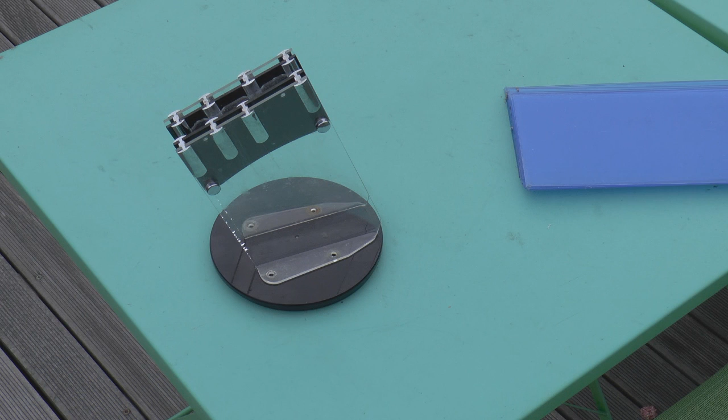Today we're going to take a bit of a diversion. Now, I've had quite a few people ask me just how I go about designing some of the things that I create. It's a very difficult question to answer because I can't really tell you. It's a really strange thought process that you have.

Today I'm going to show you how I go about solving a problem, which I haven't got a solution for yet, but I've recently acquired a Nespresso machine. All these silly little coffee pods, they don't really sit very easily in that container. You have to use up cupboard space to store these things.

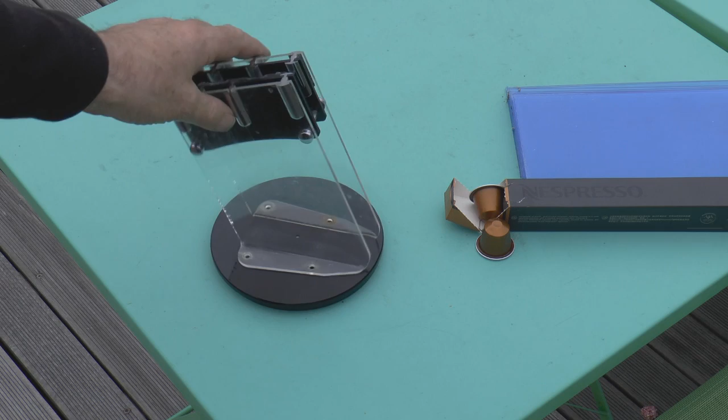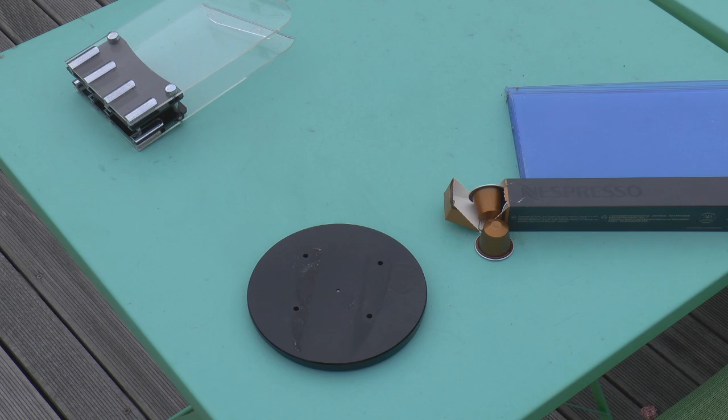Some of you may remember back to a project that I undertook for my wife for Christmas, and I made her a brand new knife block for a set of knives that she had for Christmas. And this is the old knife block that we dispensed with. It's got a nice rotating base on it, and if I throw that piece away, that becomes the starting point for my Nespresso coffee pod holder.

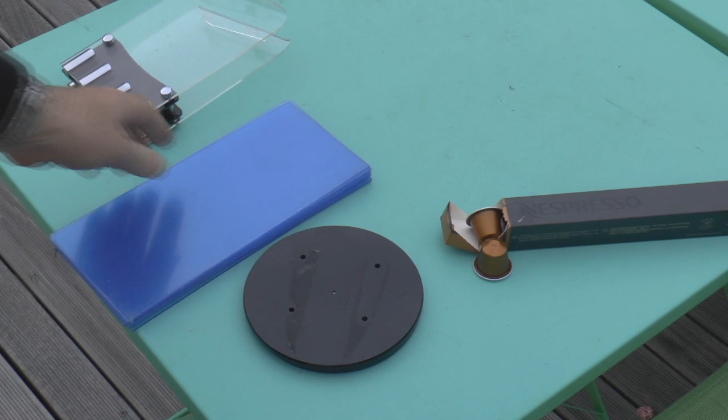Here I've also got a whole load of 1.8 or 2mm thick blanks, which I'm going to try and make use of. So we've already got a few design constraints before we start. And so what I'm going to do now is to take you through the process. I don't know what that process is because I haven't done it yet, but I'm going to take you through the process that I'm going to use to try and create this coffee pod holder.

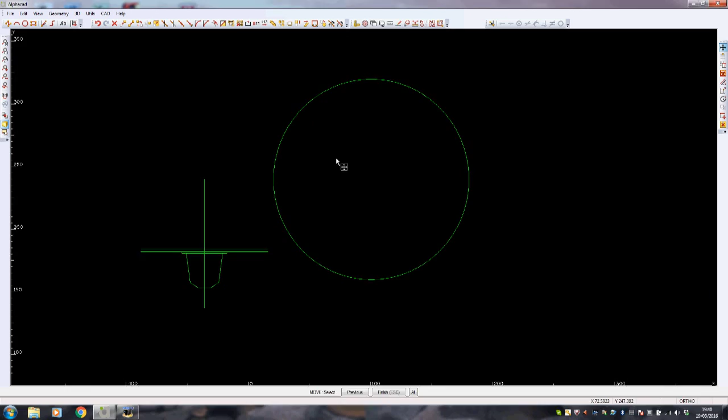Okay, well here we are in my CAD system with the basic components that I'm going to be able to use. Here I've got a picture of the coffee pod, which I've measured accurately with my digital caliper. And on top of that I've put a piece of my 2mm acrylic, and here I've got a 160mm diameter circle which represents the rotary table that I'm planning to use.

So what we've got here is basically a plan view looking down from the top, and how I imagine this is something like this. That would be an ideal position because the coffee pods do not hang outside the rotary turntable. So if the rotary table fits somewhere, then the coffee pods won't clatter into anything else.

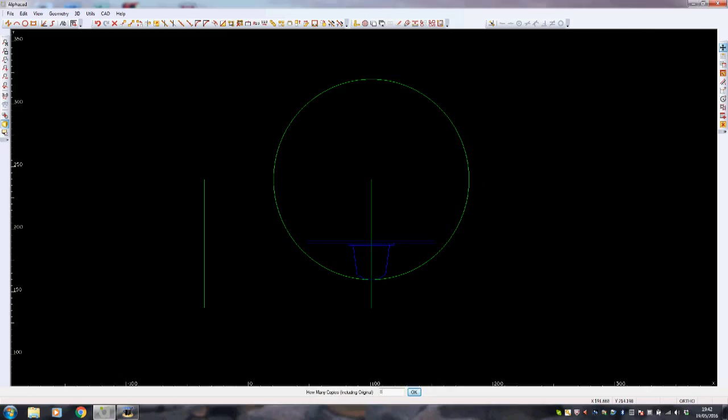Let's just have a quick look to see how many of those I can fit round here, because it looks as though I should be able to fit 8 of them. So I'm not going to explain how my CAD system works, I'm just going to do it and you can see the end result. F8, 45 degrees, enter 8 of them. And there we go. So now I've got a pattern of 8 of them.

But that's not quite going to work how I imagined it at the moment, because if we look here at the coffee pods, what I'm trying to do is to get the coffee pod sitting against a back plate, and I want to extend that back plate through to the next coffee pod, so that that back plate, when it's extended, captivates this coffee pod here. And I can't quite do that at the moment because the coffee pods are too close in to centre.

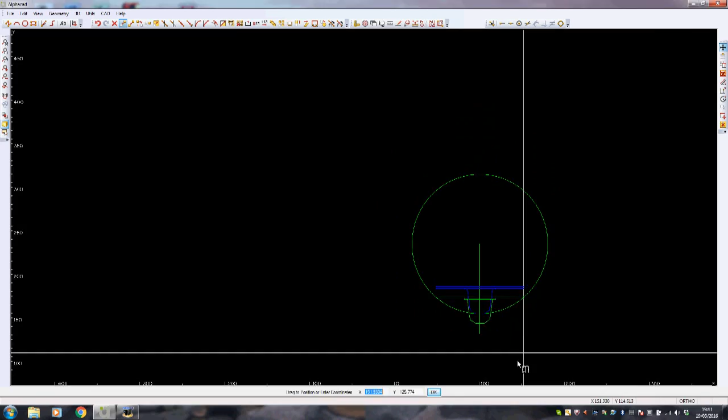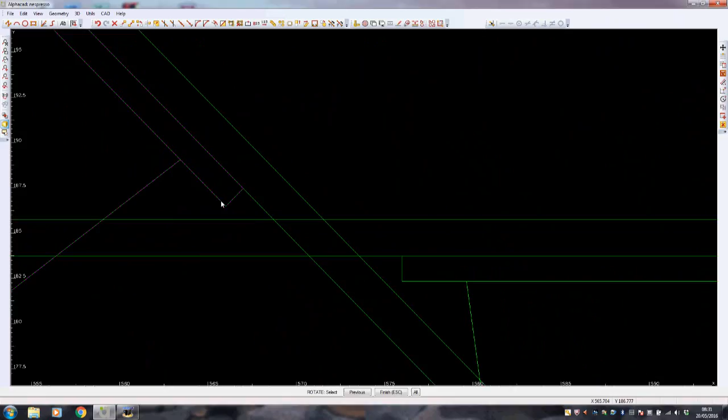So let's just back up. So we move the coffee pod and its piece of material. We'll move it down to a position like that. And now we'll try and put 8 of them in again. 45 degrees times 8. And now what we've got to do is to zoom into this area here, and all of a sudden we can see that the coffee pod corner is clear.

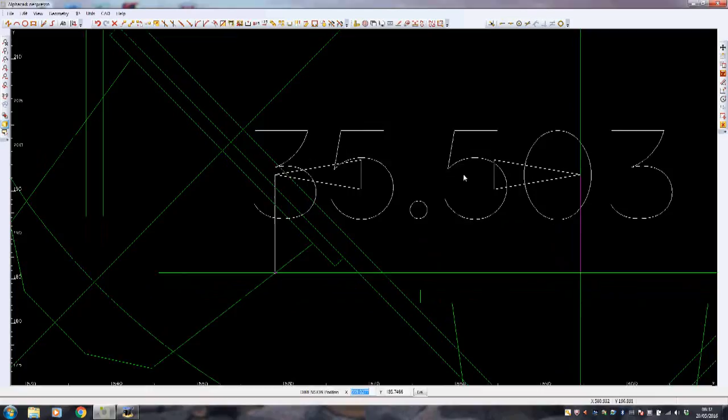We'll just measure a horizontal dimension from the centre line there to where it's going to hit that next coffee pod. That's a dimension of 35.5. So I think what we'll do, we will make this dimension here 35mm, and the quickest way to deal with this is to back up and get rid of everything, and then we'll put an offset of 35mm.

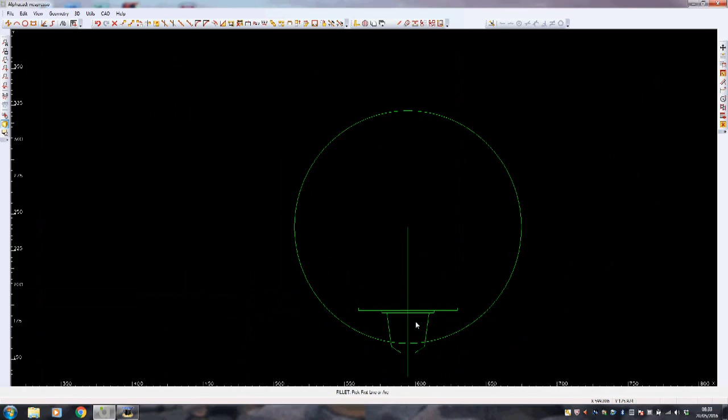Right, so that's now one of the main elements. When I say designed, we've got a long way to go yet, but that's the fundamental design principle sorted. So what we can now do is do a repeat of the rotate.

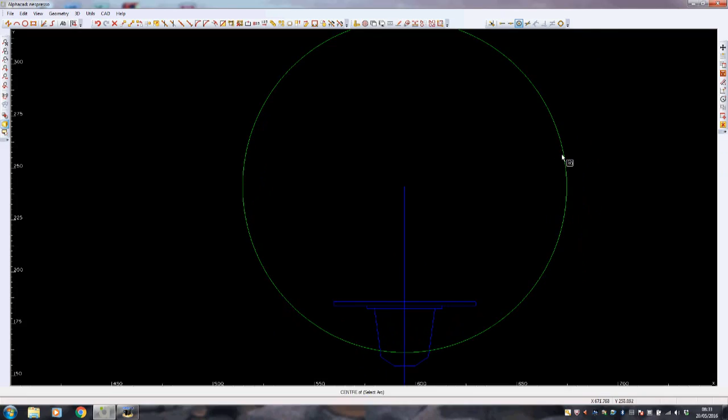Well, there's our geometry sorted out. We've got the intersecting plates, and when I say intersecting, if you hold your hands up with your fingers apart and then put them together, they will interlink, and that is effectively what I'm going to try and achieve on these corners. So now what we need is a view from the front.

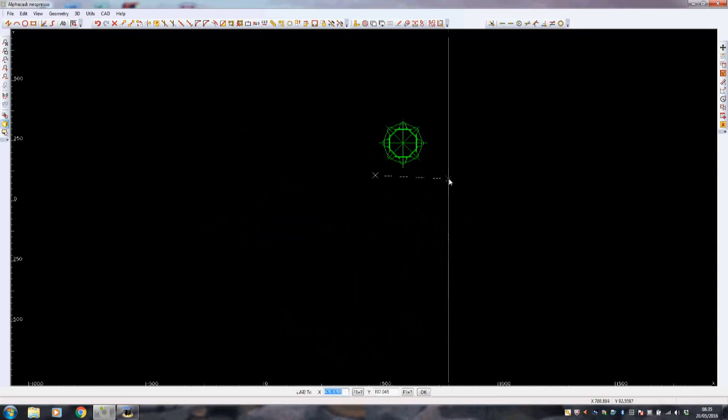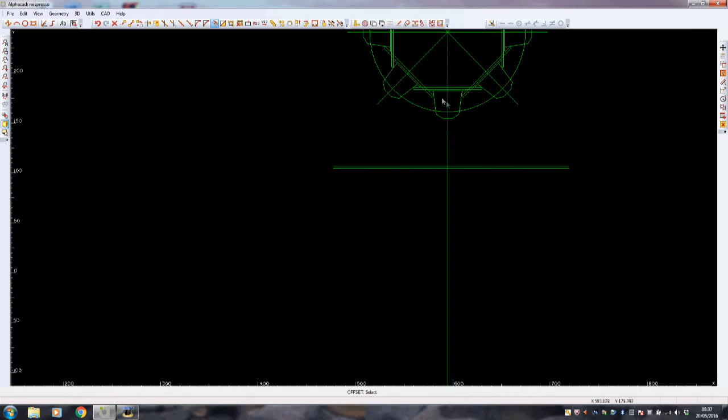So start off with a line. It's going to be a horizontal line, and I'm going to draw a line across the top here parallel to this one, 2 millimeters down, because that's the top plate that I've got to have on. And then we're going to try and fit probably 6 coffee pods into the height of the material that I've got available to me. The coffee pod size is 37.1,

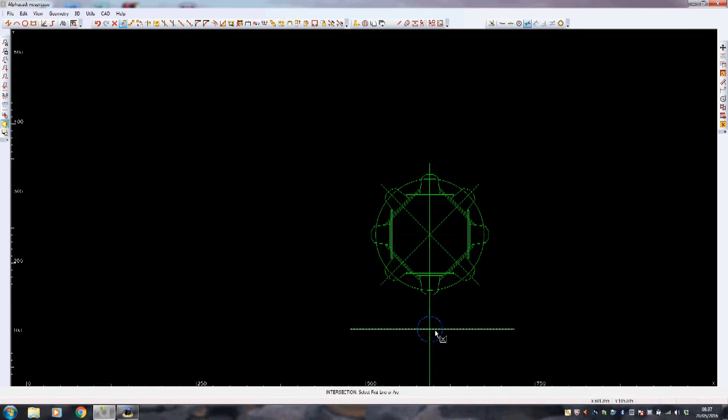and we'll position that circle just here for a moment. And then we'll reposition that circle. We'll move that circle from its known position so that the intersect there goes to that intersect there. There we go. So now we've moved that to just the top of the stand, and now we're going to put 6 of them in.

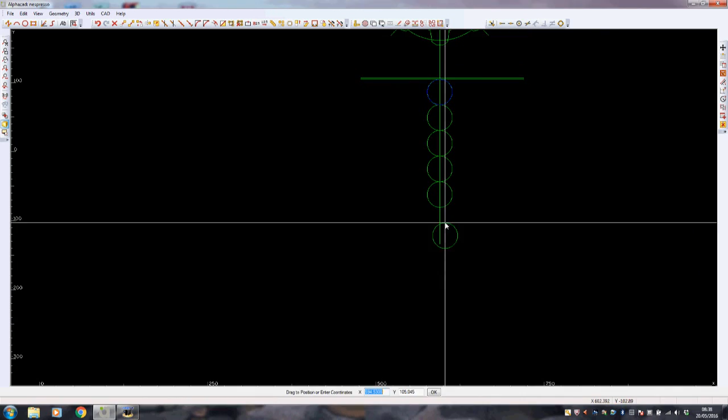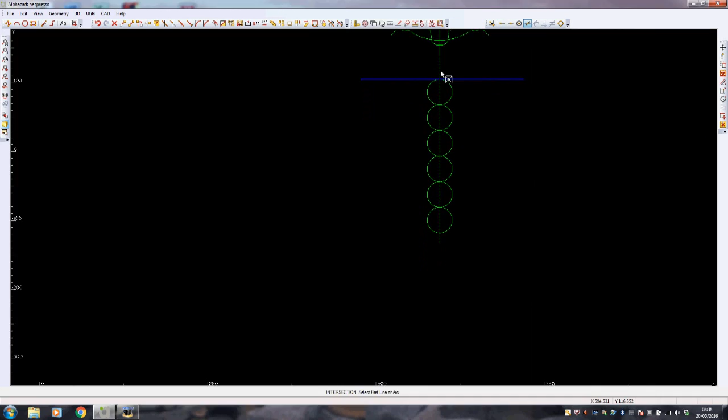And there we go. And so now we can draw, let's copy that line. So we'll copy both of those lines. And we'll copy them from the intersect at the top there to the intersect at the bottom here. That's defined the height of the unit. And now what we've got to do is work out what shape we're going to see on the front here to get these plates to overlap.

So to do that, I'm going to copy that line there, from there to there and there. Alright, so that's the width of, let's extend that. So that's the width of one of our panels.

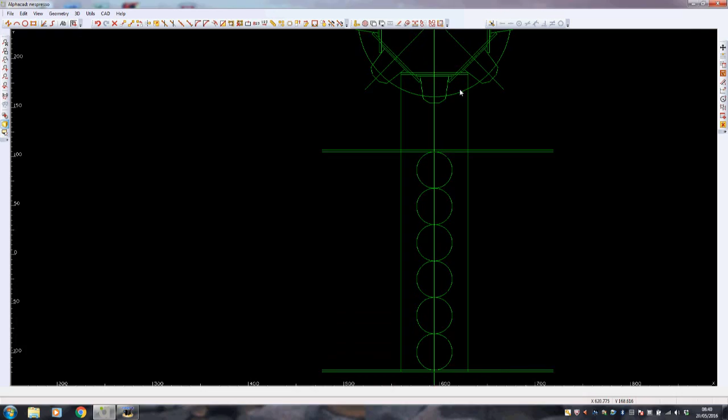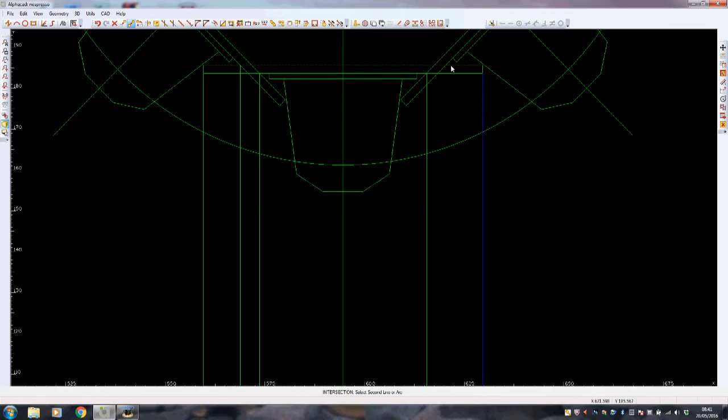Now the other thing that we need to do is to work out how we're going to overlap these. I'm going to copy this line from here to the intersect of that line there and the intersect of that line there. And I've got an idea I might need, while I'm here, that intersect and that intersect. Let me just have a think for a second.

Unfortunately, you can't see what's in my mind. I can imagine what these pieces are going to finish up looking like, whereas at the moment all you can see is a few lines on a piece of paper. And I'm sorry, but that's the nature of design. It happens in the head, not on paper. What you see on paper is some sort of magic transference from the image that's in the mind. And that's why it's going to be so difficult to show you guys exactly how this process carries on. I think the best thing to do is to start drawing a few lines on here, and then it will probably start to become a little bit clearer what I'm seeing in my mind.

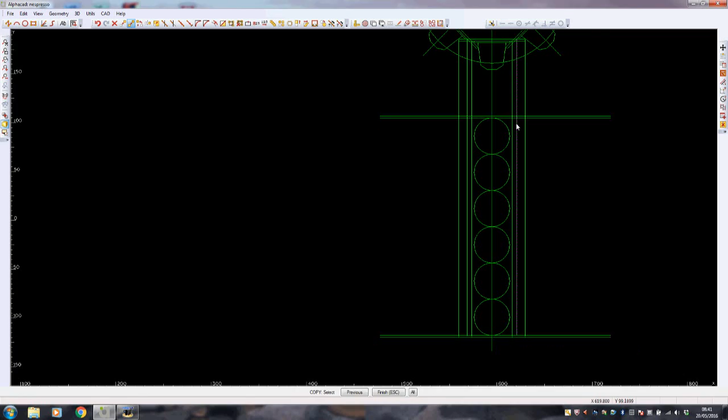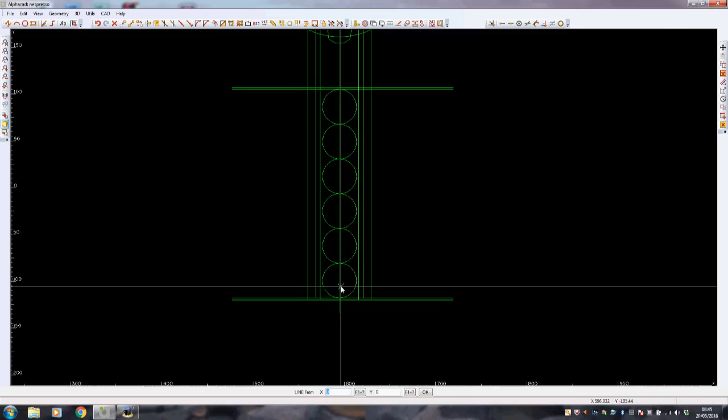Now what I need to do is to make sure I can get the coffee pod out at the bottom. So to do that, I'm going to draw a line halfway across the coffee pod so that it gets 50% captivated, and then hopefully there'll be enough clearance at the bottom for it to come out, but it won't naturally fall out. That's where the bottom of my fingers have got to finish. And from here onwards, we'll start choosing some random numbers, and I think I'll choose a nice round number, 10 millimeters. And I'll put some offsets in.

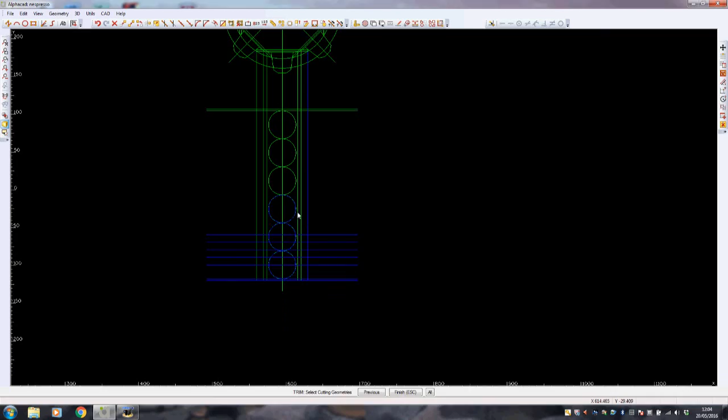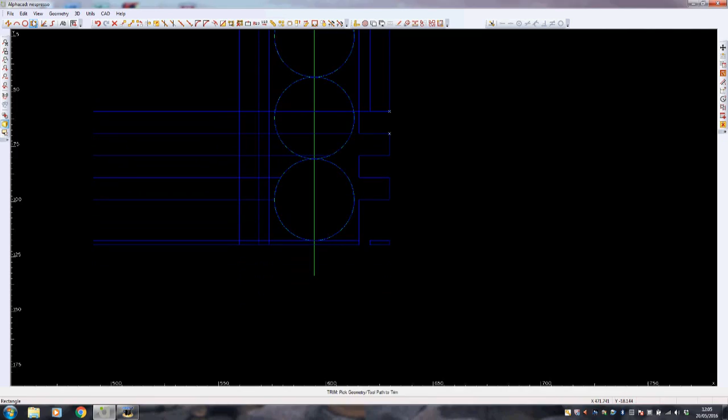I've got to do a bit of trimming. I don't know how many of these lines I need, but we'll put them all up for trimming. And we certainly don't need any of these here, so we can trim all these off. So we can trim that off. Now there's my first finger. So let's just delete everything else. No, while I'm here, what I really ought to do as well is to turn this into a rectangle. So we'll select a rectangle there, and I will put a rectangle over that particular spot there. Now I'm going to delete these lines.

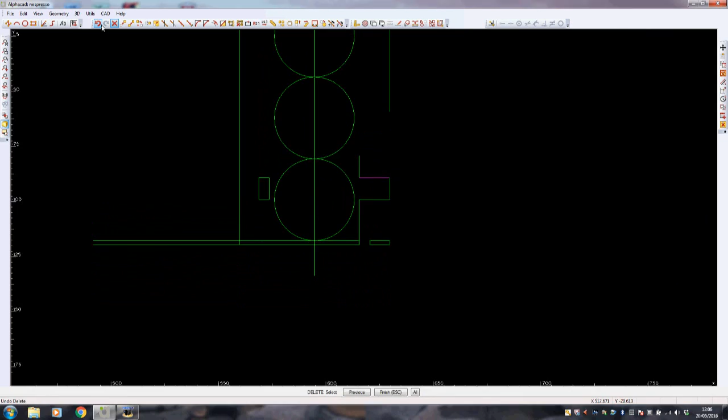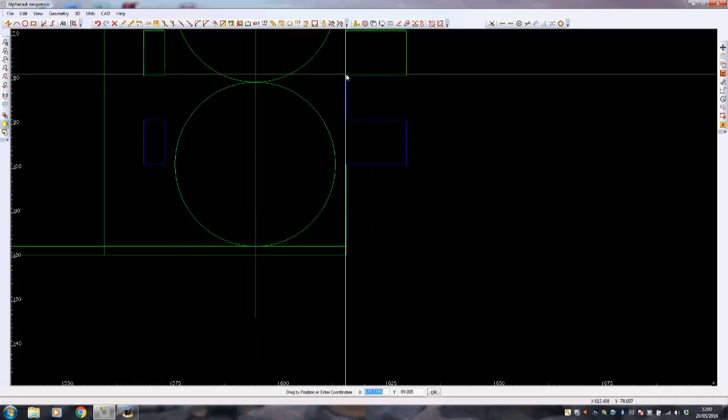And in fact I'm going to delete that one, and that one as well. And now I'm going to join to make into a single feature that little piece there. Yes, it's now one feature. So we copy that, and we copy this from an end point here to an end point here, to an end point there, to an end point there.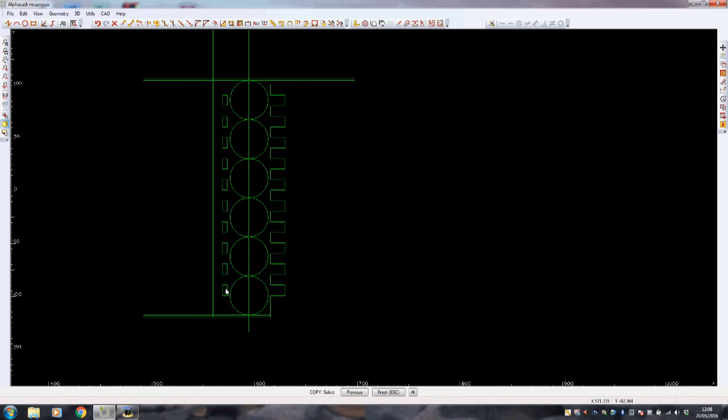So we're copying all these features up like this. Now hopefully you can begin to see what was in my mind. These fingers plug through these holes. What I'm going to do now is put some little fixing tags on the top and bottom. So I'm going to use 4mm, I think, for the length of a fixing tag.

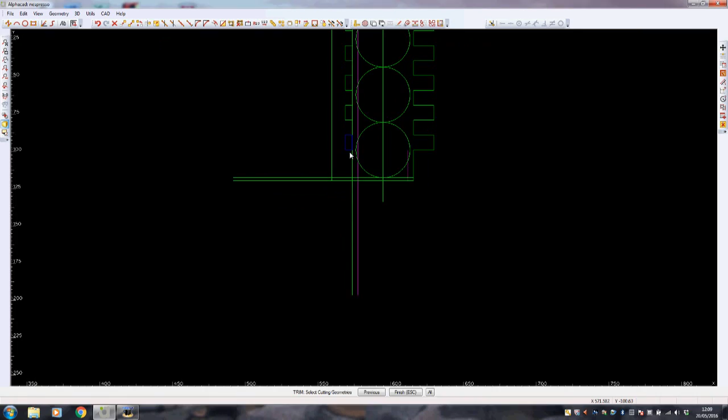And we'll do something else I've forgotten as well. When this is the center line, if you remember, of the coffee pod, and what I've got here has got a continuous edge that goes all the way down. Well, I can't have that continuous edge all the way down because I want the coffee pod to come out. So I need a line across there at the center line. So first of all, let me trim that. There we go. And now we'll do some trimming.

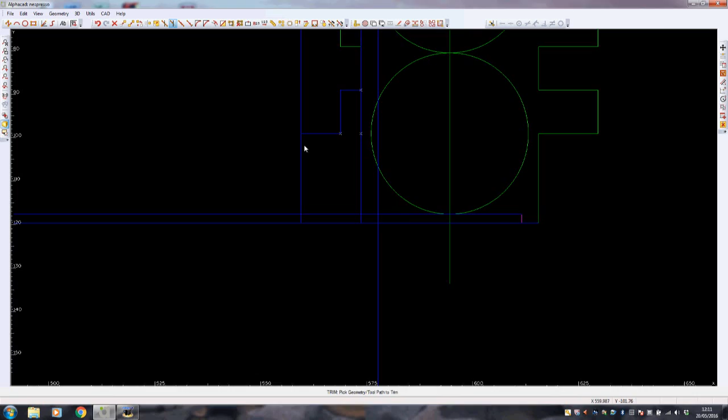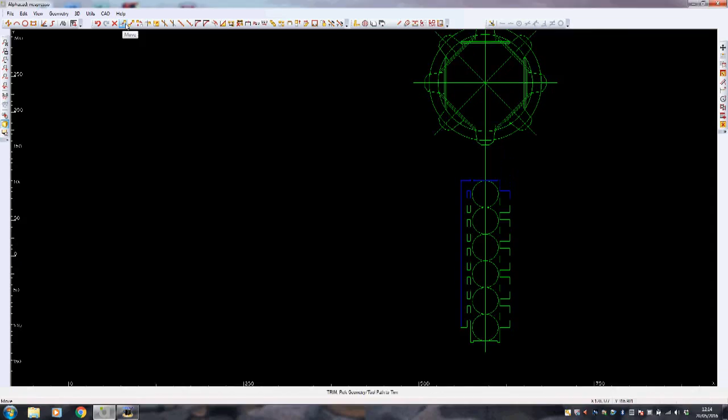Right, we'll trim that, we'll trim that. Let's take a look at the top here, and we'll do some trimming up the top as well. And there we are. So I do believe that that's the vertical panel finished. So let's just do a copy of that. That's the easiest thing to do. We'll move it across there.

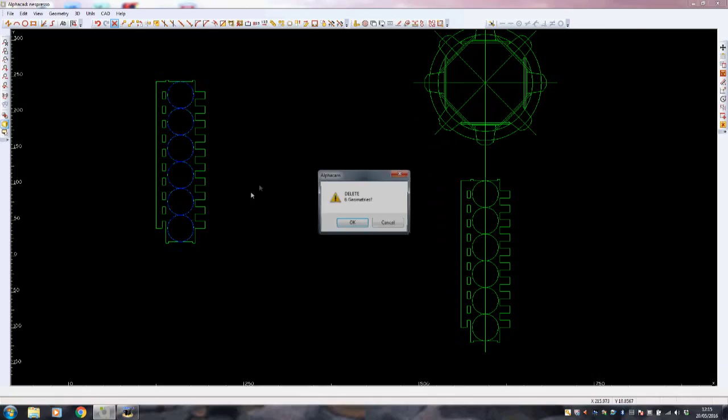And then we'll do a delete on the center line, and let's join everything to start with, and then it won't fall apart. And now I can do a delete on just the circles, and there's our vertical panel. We need 8 of those, and they will all plug together. So what we've now got to do is to organize the top and the bottom plate that this will plug into.

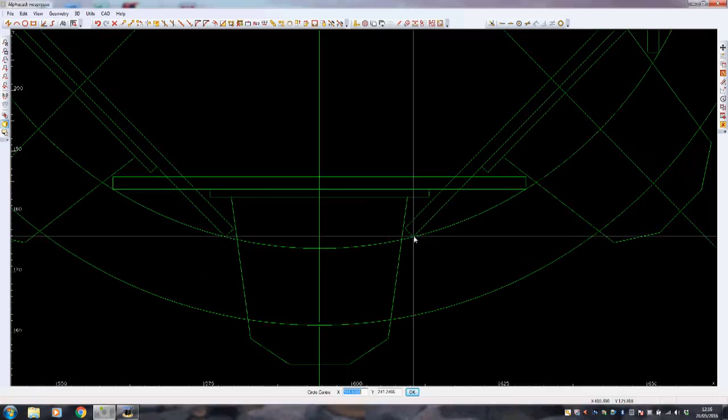Right, so what I'm now going to do is to put a circle in for our top and bottom plate, and I'm going to make it from the center of this circle, and I'm going to bring it out so that it just touches the extremity of our vertical plates, which will be just that corner there. Okay, so that's the size of the base plate that I'm going to use.

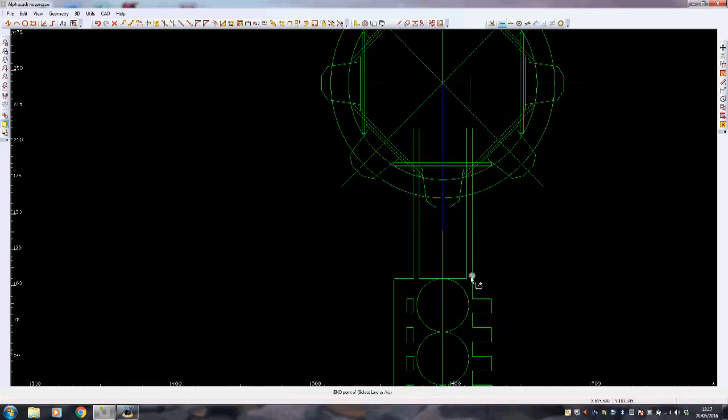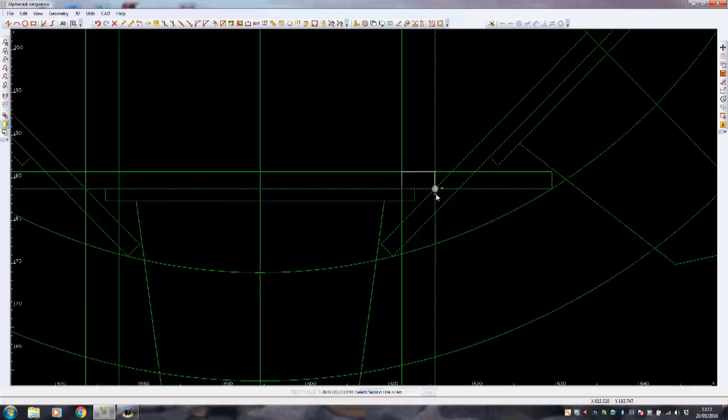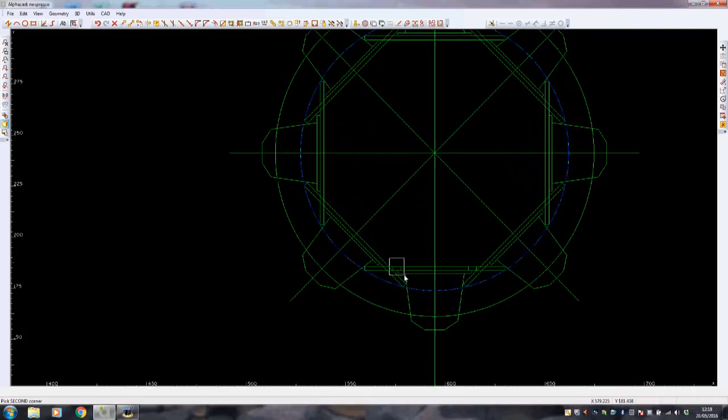So now I can delete these lines, and what I'm actually left with is the squares. So to make this top plate is really simple, because all I've got to do is to copy. I'm just going to copy the outer diameter and those 2 squares, and I'm going to move that out of the way so that we can see what we've got. I'm now going to rotate that pattern of holes about the center of that circle, by 45 degrees and 8 copies. And there we go. It's as simple as that.

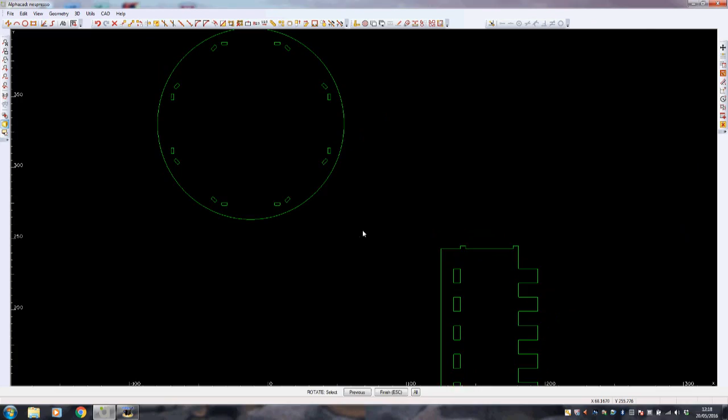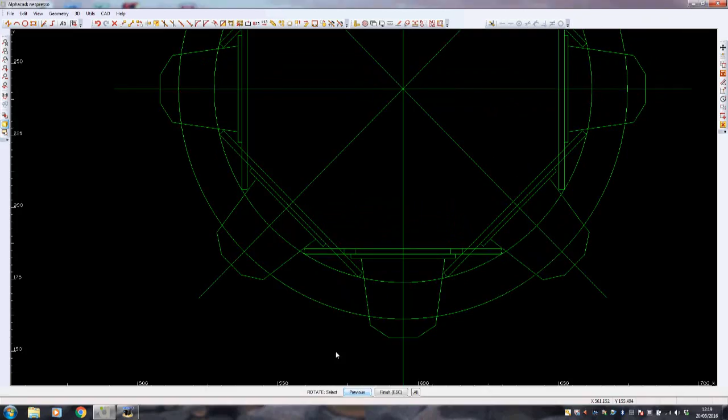One of the other things that I can foresee, I can't leave this as it is, because if we take a look here, how am I going to get my coffee pod in if this piece of material here is in the way? I probably can't. So consequently, I'm going to have to chop some of this material away so that it allows my coffee pod to go into the top of the slot and probably come out the bottom of the slot as well. Right, here's the plan.

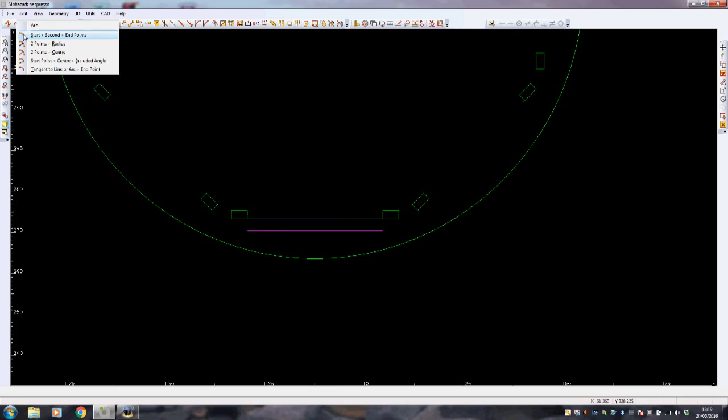We'll put a line across here and here, and we'll then put an offset of about 3 millimeters from there. And now what I'm going to do is choose an arc. This is a 3-point arc. I'm going to start the first point at the intersect between that, and then I'll go to the center of that line, and then I'm going to go to the intersect of that line and there. And now I can delete this information here because we don't need that anymore.

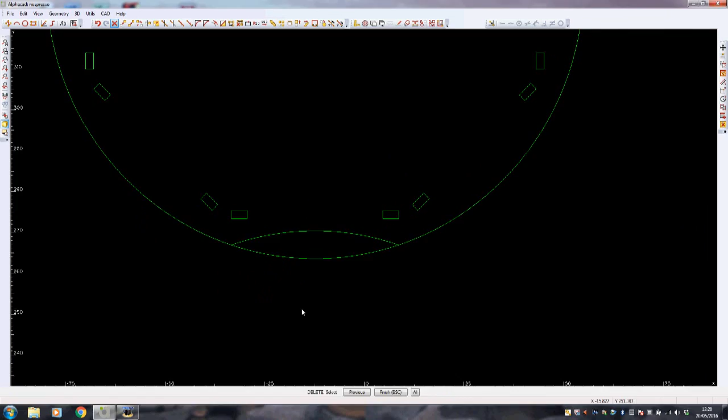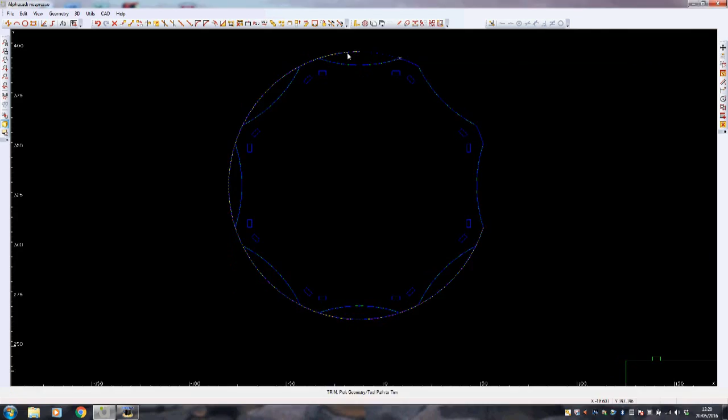Replicate it 8 times around the edge of the circle. So we do a rotate on that feature from the center by 45 degrees and 8 copies. And I'll put a trim around the whole lot, and we'll just trim these excess pieces away. The bottom plate is going to be an exact copy of this top plate with one exception. So first of all, let's do a copy.

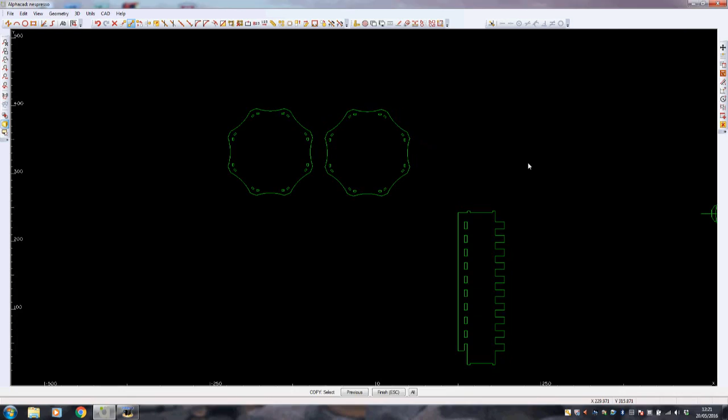I've got to go away and measure the holes, the fixing holes in the base plate, because I've noticed that those fixing holes, they're not in the center. They're in a funny position. So I'll go away and measure them and pop them onto the drawing here.

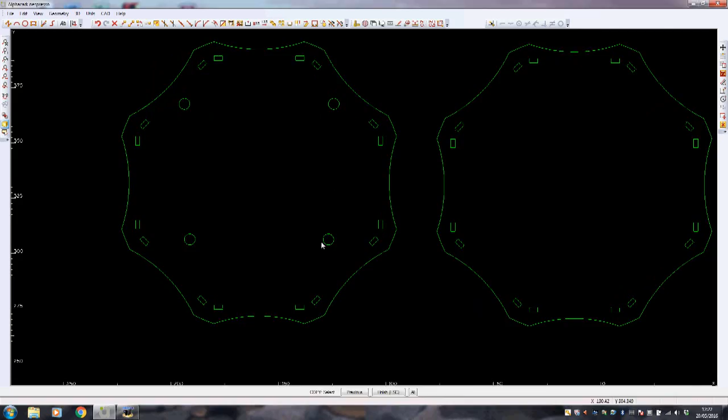Okay, so there's my holes, and as you can see, they're well off center, but it doesn't matter, provided it's not interfering with these vertical panels, which these holes are getting close to, but they're not. So let's just step back for a second, and I do believe that we are now virtually finished. In fact, we are finished.

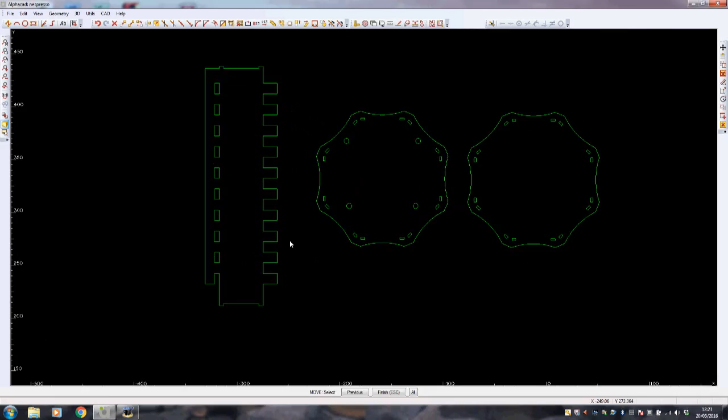Right, so all we've now got to do is to send that off to a DXF file, and we can start programming it up in RDWorks. Okay, well here we are in RDWorks with our file imported. And the first thing we're going to do is to throw these two away, because what we need to do is to make a little program for this, because I've got to run this several times.

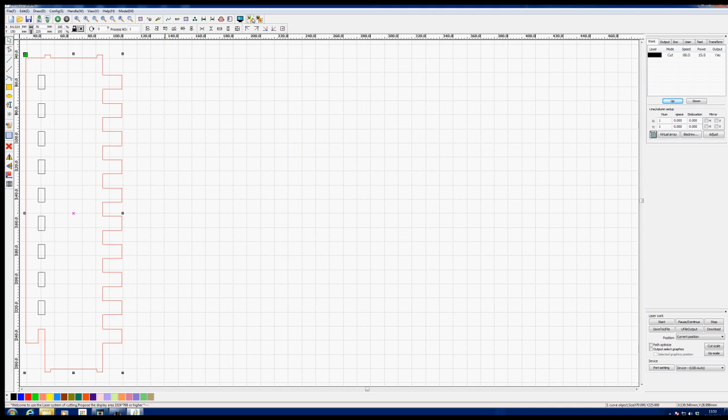What I'm going to do is use my standard programming technique, which is to group all my holes together into a group, and then I've got the outside which I can put into another group. Now there's only 2 features on this, but at least it means I get control of how they're cut. So we'll now go to Cut, Edit, Properties, and what I can do is select the holes and put them in the list first, and then the outside will go into the list second. Done. It's as simple as that.

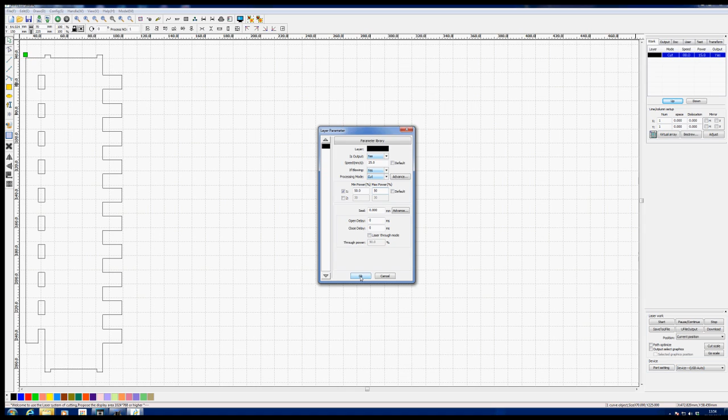We'll just check the speed, and the speed is totally wrong. We need that around about 25 millimeters a second, and we can have a power of about 50%, which is about 60 watts. Okay, so I'll save that to a memory stick, then we'll delete this one, and we'll re-import the file again, and this time we will remove the bit that we've just programmed, and we'll program the other 2 pieces.

Again, what we're going to do is to group the holes together. Just the holes have turned red, as you notice, and we'll put those into a group. Then we'll put the outside shape into another group, and then we'll go over to this one and we'll put just the holes into a group and the outside shape into a group.

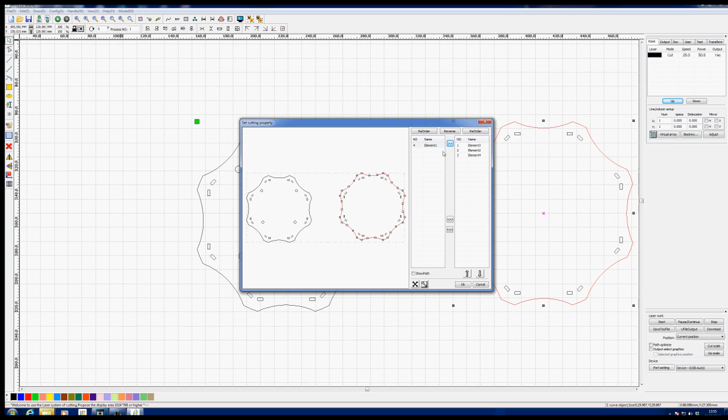And now we'll go up here to our Edit Cut Properties, and we can choose the holes to be cut first, then the outside shape to be cut next, then the holes to be cut next, and then finally the last outside shape. Done. Okay, so we just save those to a U file, and we'll meet up at the machine.

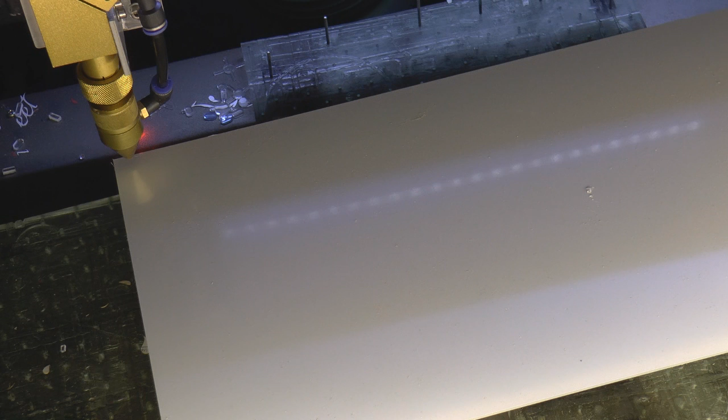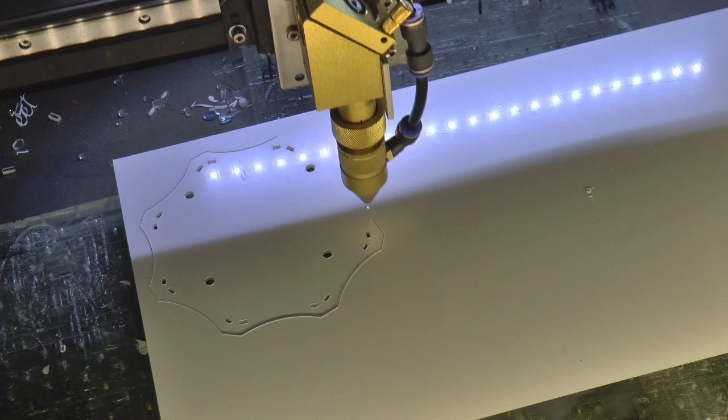Okay, and now we're going to have a go at cutting the discs. First thing we do is we're going to put these screws through, but we're not actually going to fix it down at the moment. At least those holes all line up, well, more or less. That's not going to come off there now anyway. Yeah, that's more or less central.

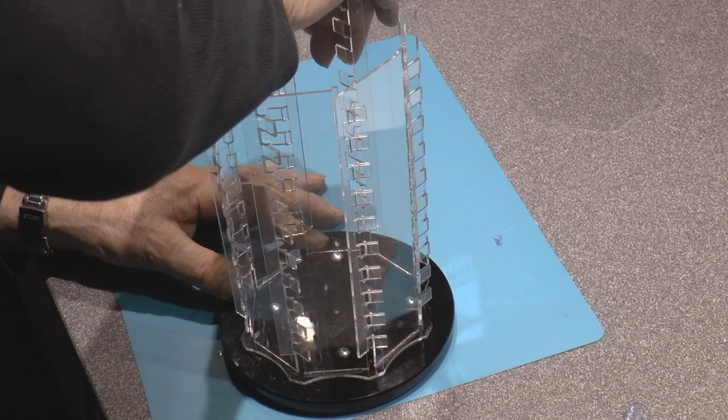Okay, how do we put these together? One. Two. That was a little bit of a challenge, but we got it all in. Now we're going to get the top on. That's an even bigger challenge. Can't put these in one at a time. They are popping in, which is good news. And there we are, it's all nice and stable.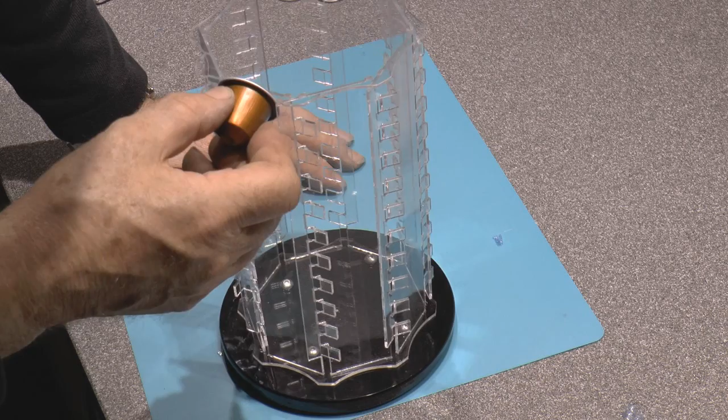Do they go in? Yes. Do they come out? No. Not easily. Well, yeah, I suppose they do, because it flexes. Yeah, that's probably just about right, actually. Look, you just flex them out. Yeah, they just pop out of the bottom. They're actually very nice. They just require a little bit of force to get them out. Yeah, I'm very pleased with that.

So all I've got to do now is just put a little bead of glue around here. Well, this wasn't a particularly difficult project, but it's been an interesting project, and I hope that it's been beneficial for those guys that requested to see just how a product was produced.